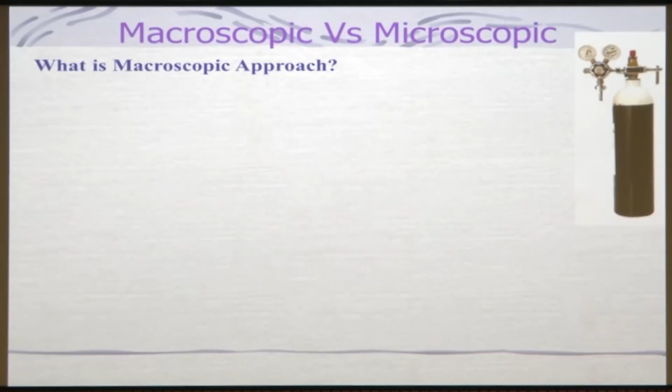If you look at this cylinder, the lower portion is black and the upper portion is white. From the color, if you know the code, you can say what it contains. I urge you to look at the color codes of gases. As an engineer, whatever your role, whether on the shop floor or in the plant, you need to know that. This one contains air, and the color code is black and white, though it may differ across countries. Nowadays it is becoming homogenized and we follow international standards.

So this kind of circular cylinder contains a certain amount of air, which is mostly oxygen and nitrogen. There are several other gases present in very small percentages which we are not bothered about. These two gases will be at higher pressure since it is a pressure cylinder. When you talk about it, what is happening to the molecules? Let us say two molecules, oxygen and nitrogen, for simplicity we assume air consists of oxygen and nitrogen, and they will be moving around, colliding and interacting with each other.

If we look at those things tracking each molecule, we call it the microscopic approach. But in engineering sense, we will not be looking at that level of detail, we will be looking at it grossly, meaning what is happening to the pressure. For example, this cylinder has a gauge, and this is known as the pressure regulating valve.

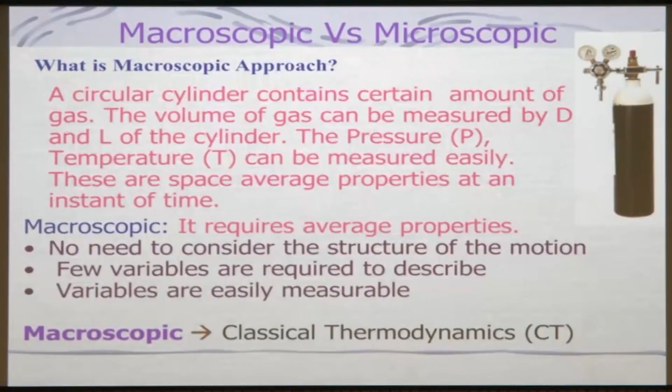Now, few variables are required to describe the system, whatever it is. So very few properties you can use, and variables are easily measurable - you can measure pressure, temperature, volume, these are the things, or other properties you can measure. Therefore, we will be dealing with this macroscopic approach to analyze thermodynamic problems, and this thermodynamics is known as classical thermodynamics. So in this course we will basically be dealing with classical thermodynamics, where we will be looking at macroscopic properties, or the macroscopic approach will be utilized to analyze the problem.

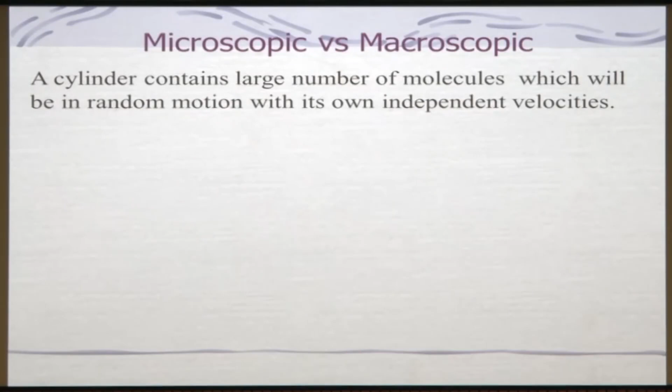Just to give you a glimpse of the meaning of the microscopic approach, let's take this same cylinder containing a large number of molecules, as I told you - like in case of air it's oxygen, nitrogen, but it can be several other kinds of molecules, which will be in random motion. It will be moving all the time, and will have their own velocities, because they will be colliding, and then velocities may be changing for each individual molecule. Not all molecules will have the same velocities.

It will be changing, and as a result, we need to look at - for example, if I take a small slice from the cylinder, 1 centimeter cube, how many particles will be there? It will be something like 10 power 20 particles, meaning molecules - these are very big numbers. Now I want to look at each individual particle, how they are doing.

So what will happen - the state of a particle can be specified by the coordinate system. If I take this as, let's say this is your x-axis, and this is your y, and perpendicular to this is your z. So now the coordinate system has to be fixed, and each molecule will be moving around. If there's a molecule here, it will have velocities in the x direction - vx, or it can be vy, and vz direction. And when it has these, you will also have to look at momentum.

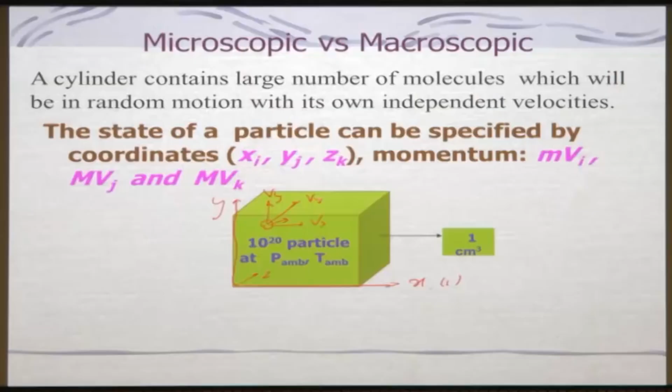Even the best computer cannot really compute with such enormous computational power needed. Now, how to deal with that? Is there any other way of looking at molecular level interactions and the extent of molecular activities? Is it possible? This is where we use what we call the statistical tool.

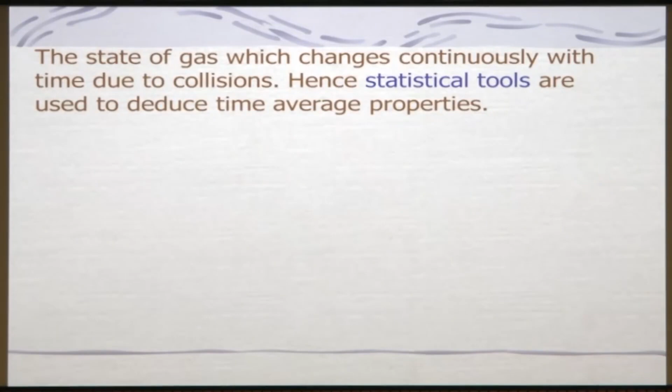So, it is being used, and such an approach where you look at microscopic effects like each individual particle or molecule, sometimes even atoms, is known as the microscopic approach. The state of gas changes continuously, because all the time each molecule will be interacting with other molecules, and we use tools known as statistical tools to deduce these average properties which we are more interested in. So, statistics comes into picture, and this thermodynamics is known as statistical thermodynamics, and microscopic means dealing with matter at a molecular level.

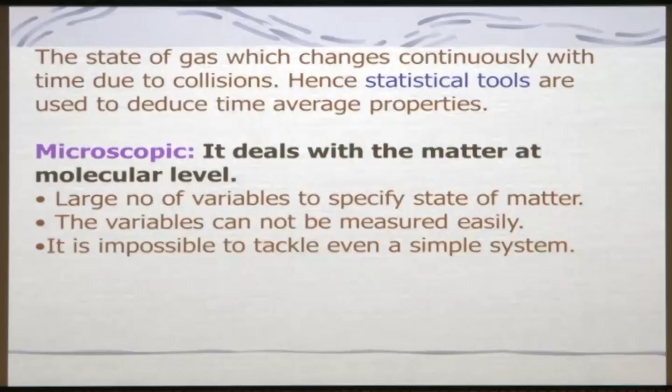So, in this case, there are a large number of variables to specify the state of the matter, and these variables cannot be measured easily. If I want to look at a molecule interacting, what is its mass and what is its velocity is very difficult to measure, and it is impossible to tackle even a simple system.

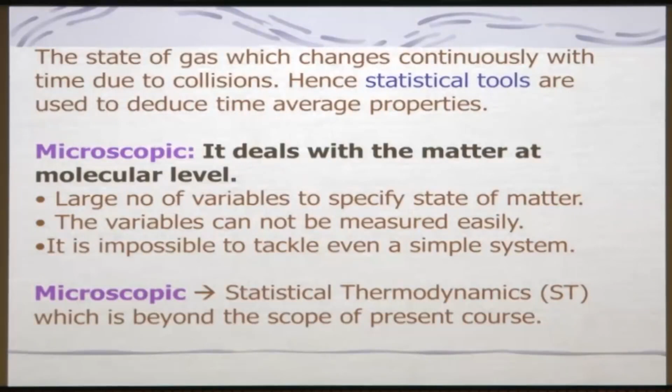And therefore we use the statistical tool, and the thermodynamics related to that which uses the statistical tool is known as statistical thermodynamics, which is beyond the scope of the present course. We will not be dealing with it, but if you are interested, you can take other courses in our institute, maybe in the department of physics and chemical engineering, where they do offer it.

However, sometimes I will give you a flavor of the microscopic approach whenever we are discussing it, on some occasions.

Now, whenever we are looking at these physical properties, we need to look at their dimension, because physical quantities will be characterized by dimensions. What do you mean by these dimensions? Any idea?

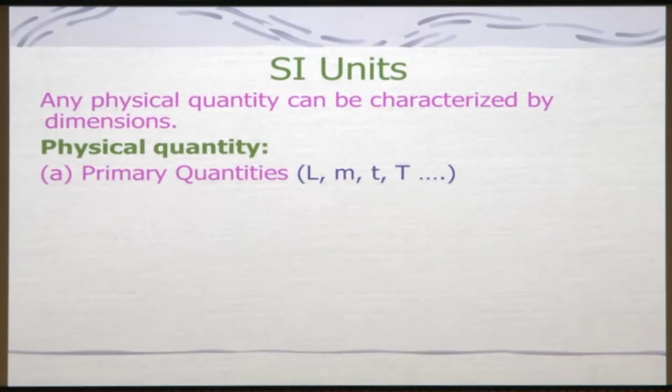Because if there is a physical quantity, we will have to assign something to it. For example, you say length — for length we will have to say it is a meter, or time, the second, like that. And if you look at these physical quantities, they can be divided into two categories: one is primary quantities like length, mass, time, temperature, and similarly there are derived quantities like velocity, acceleration.

Velocity is basically change in displacement with respect to time, and acceleration is change in velocity with respect to time, and force, and pressure which is force per unit area, and other things like energy. So, whenever an arbitrary magnitude is assigned to this dimension, we get the units.

So, for example, earlier days people used the British system — feet, pound, second, degree Fahrenheit — which are quite clumsy because it is not really very good. For example, if you look at the foot, 1 feet is equal to 12 inches, and inches again will be a little difficult to use, and other things.

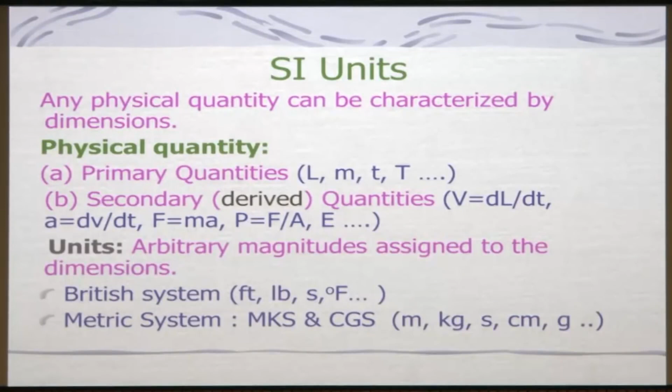Earlier days in our country also we were using the British system, but later on we found the decimal system, that is the SI system or MKS system, is quite convenient. So that metric system is being used — in the MKS system that is meter, kg and second, and in the CGS system we call it centimeter, gram and second kind of things, and this is being used very much.

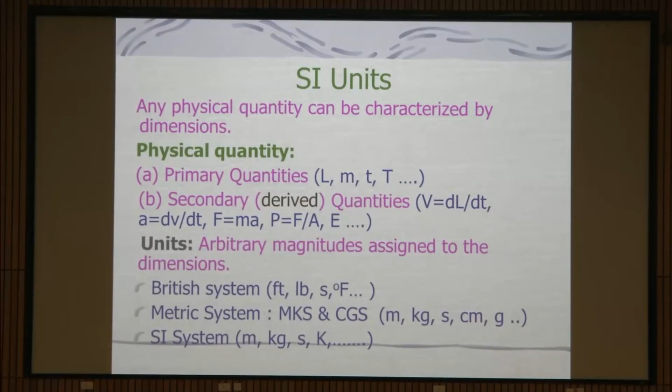If you go to our market, people are still using the British system, although it is less common now. At the international level, we use the SI system. It is the international system, and we will be using the SI system in this course, but sometimes problems may be given in other units, so you should know unit conversion.

In the SI system we basically use meter, kg, second and Kelvin. These are the international standards being used for mass, length, time and temperature.

For example, the basic SI unit for mass is kilogram, a standard alloy block of platinum iridium maintained at the International Bureau of Weights and Measures near Paris. It is kept as platinum iridium so that it won't change with time, a metal which won't corrode or erode.

Similarly, earlier people were keeping a metal length standard and calling it 1 meter, but nowadays that has changed. The basic SI unit of length, meter, is now defined as 16,50,763.73 wavelengths of krypton 86 radiation, corresponding to the transition between 2p10 and 5d5, in vacuum.

This is a more precise standard, because it is utilized for calibration. The primary standard, or whatever you calibrate everything with, should be as accurate as possible.

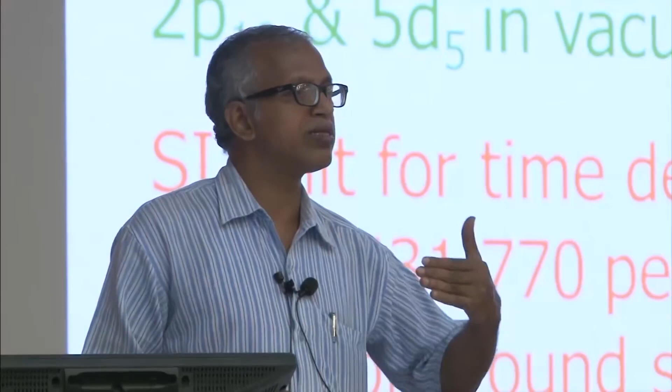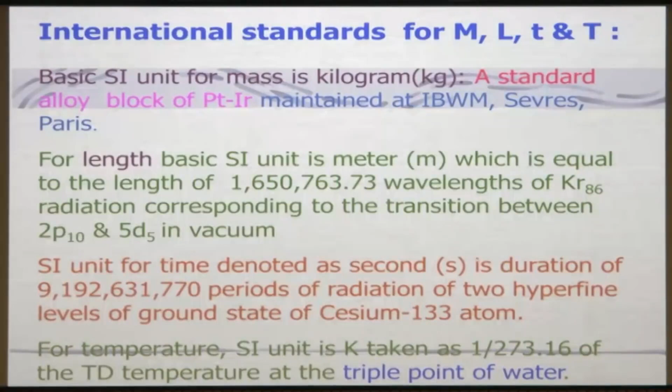For temperature, in recent times people use the triple point of water, expressed in Kelvin, taken as 1/273.16 of the triple point of water. Earlier, people used the steam point and ice point as references, but now the triple point is accepted worldwide because of its precision.

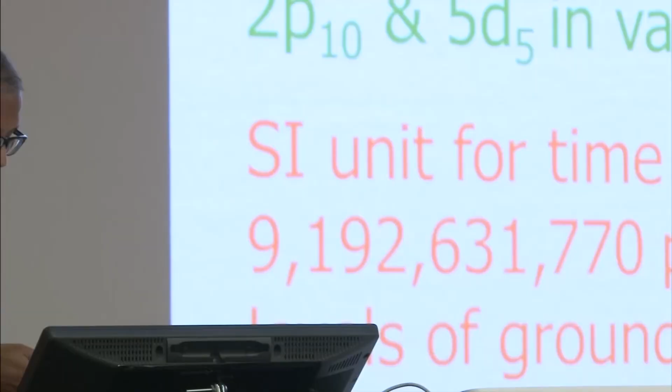We will be using various quantities in the System International, adopted around 1960. Acceleration is the change in velocity with time, measured in meters per second square, and force is F = m a, giving units of kg meter per second square, called the Newton.

Newton is a name, so we use a capital N, not a small n. Any unit named after a person is always written with a capital letter as its symbol.

Pressure, by definition, is force per unit area, and the unit of stress is the same as that of pressure since this is the normal stress. It is expressed with the Pascal, so we write Pa, with P capital and a small.

Work or energy is assigned the unit kg meter square per second square, since it comes from force times length, which is meter square by second square. One can think of it using Newton and meter, because kg meter per second square is nothing but Newton, and Newton times meter gives the joule, denoted J.

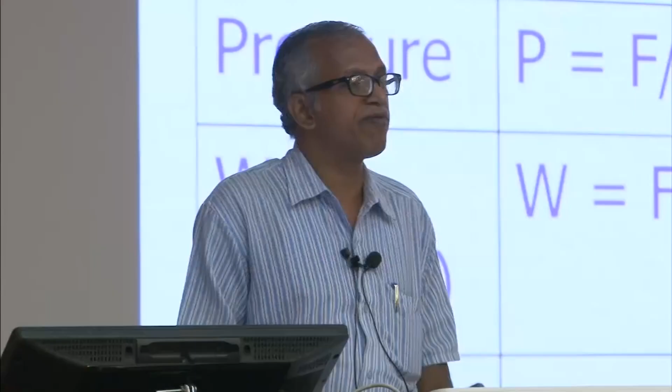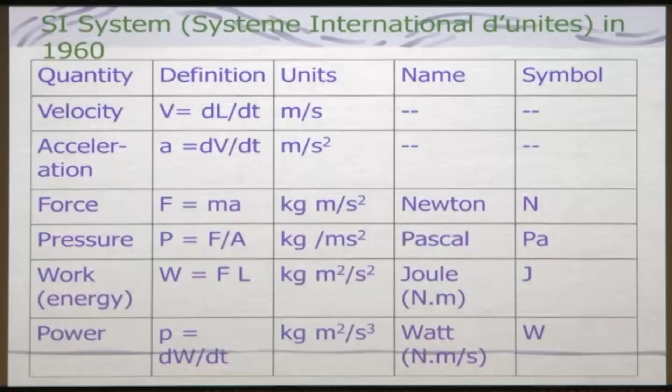Be careful, because people do fuss about it if you don't write units properly. So I will give you a few small tips on the convention for using these units.

Whenever any unit is named after a scientist, for example joules, watts, pascals, newtons, coulomb, it will be written with a capital letter. For example, 10 Newton, 1000 Pascal - P will be capital, Pascal, and A will be small.

All others are in small letters, for example 10 kg and 20 meter per second. And if I say kilometer, what will it be? It will also be small letter.

But if you go on the highway, sometimes people write it in capital, am I right? Did you observe that? Particularly you can see it on the Lucknow and Kanpur highway. You could have observed that, it is not right.

We will have to be careful: when you say Newton meter, there should be a gap. But if it is millinewton, we write m and N with no gap. So you will have to distinguish between these.

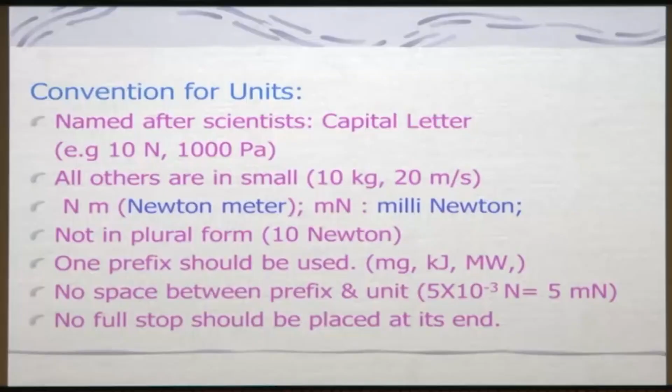Let us take a very simple example. A tank of 2 meter cube volume is filled with kerosene of density 850 kg per meter cube. Determine the amount of mass m in the tank. So we will have to do that.

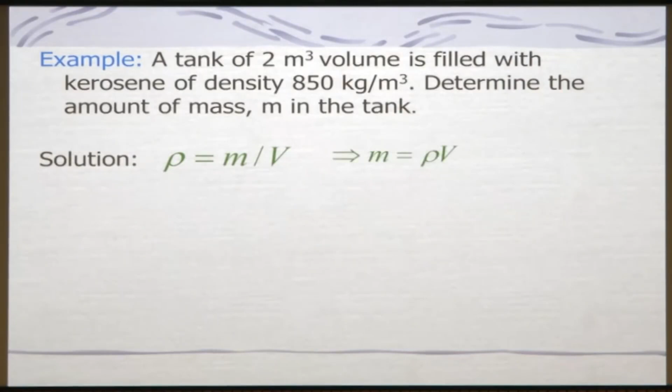What you will have to do is very simple. You are given density, you are given the volume. So basically density is equal to m by v, and you find mass is equal to rho into v, and you just plug in the numbers.

If you look at it unit-wise, on the left hand side mass is kg, and density is kg per meter cube while volume is meter cube, so it cancels out to kg. And if you put in these values, you get this number. This is a very simple one.

What does it indicate? You might be thinking, why am I showing this simple example? What is it indicating? What have you learned from this example? It is very simple - you use a formula, plug in numbers, and you get the answer.

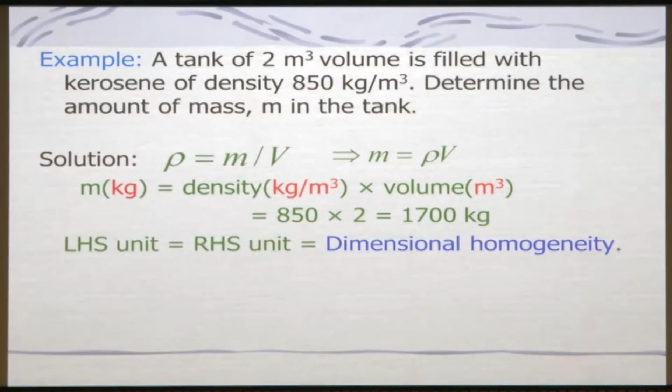It says that the left hand side unit is the same as the right hand side unit, which we call dimensional homogeneity. That means a mathematical equation should be dimensionally homogeneous, am I right? That is the first thing one has to check, whether it is right or wrong.

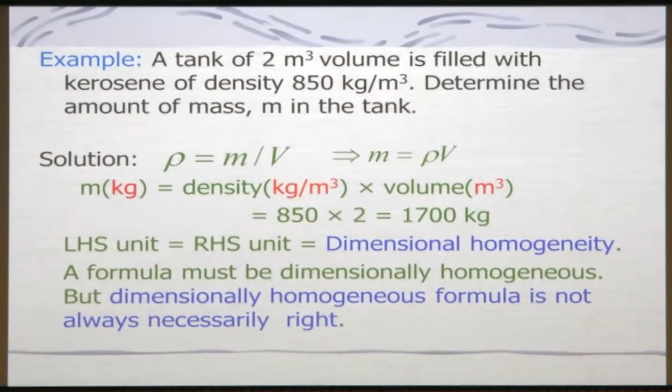And if it is dimensionally homogeneous, is it right? The equation need not be right. But that is the first condition - a mathematical formula must be dimensionally homogeneous. A dimensionally homogeneous mathematical relationship should not necessarily be right. It may be right, it may not be right. So one has to be very careful.

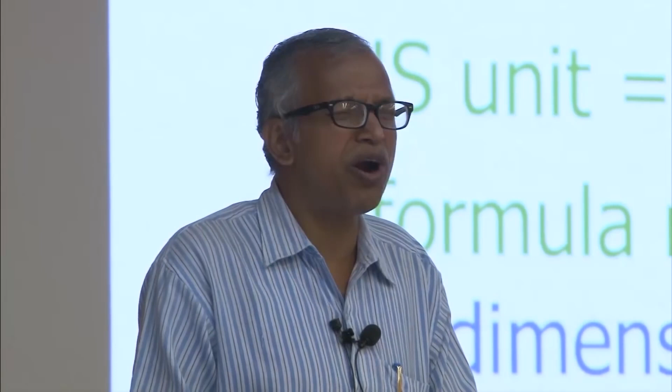So I would suggest you be careful - in the sense it is a tricky question, not exactly tricky, it is just to recognize whether you know this or not. You may say, look, it is out of my course. It is not - it is a simple thing that requires a little presence of mind, which people didn't do, as I experimented.

So you need not think, why is he giving such a simple example? But this is not only a simple example, it is a very profound example for illustrating the dimensional homogeneity of a mathematical equation.

Now we will be looking at the definitions and concepts of thermodynamics, which is very important. Why do we need to look at definitions and concepts?

Every subject has its own vocabulary. You need to understand the words or vocabularies of a particular subject properly and precisely, so that misunderstanding in that subject can be avoided. Therefore, one has to look at the definitions and concepts. Most of these things you are already aware of from your +2 level science, but we will redo it so that it seeps into your mind and you won't commit any mistake. So please listen carefully and try to think about it.

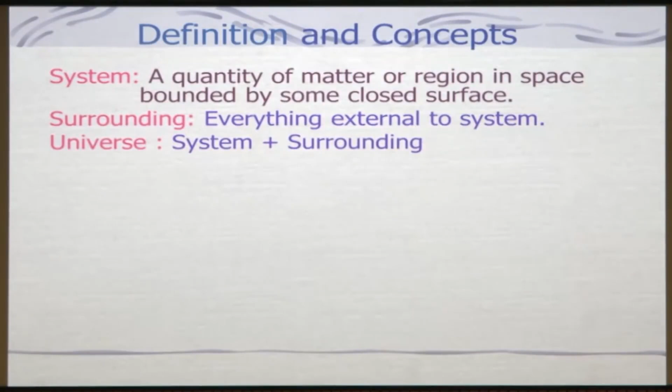So everything external to the system is known as surrounding, and system and surrounding together we call the universe. So if I look at a system here, it is having a boundary, and rest of the things will be the surrounding, and this total we call a universe. Let me take another example.

I am having a cup of tea here, and now this temperature is higher - hot tea - and it will be interacting with the surrounding. So what will be the surrounding? For example, let us consider this is the cup, and it contains some amount of hot tea, and now it will be interacting with its surrounding. What will be the surrounding?

Suppose the temperature is there, let us say I will keep this cup here. What will be its surrounding? The system I can take as the hot tea itself, or I can take the full cup as my system - I am having the liberty to choose that. Now I am interested to find out how it will be interacting with the surrounding, meaning some heat will be transferred to its surrounding. What will be its surrounding?

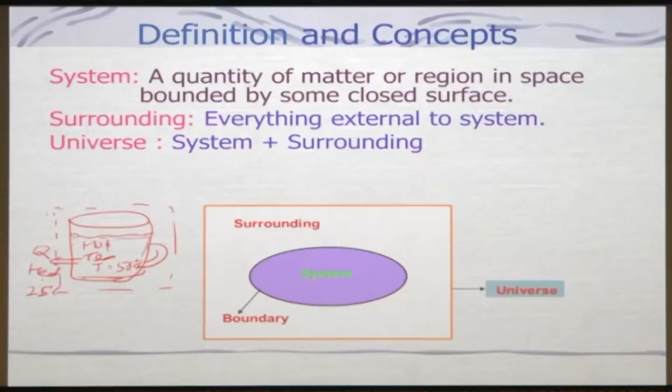It will be closer to where a change is occurring, where heat transfer is taking place. If heat transfer is happening, say the temperature here is 50 degrees Celsius and here it's 25 degrees Celsius, the change occurs because of heat transfer to nearby places, and only then do we consider it the surroundings. So my surrounding will be very close to my hot cup, where the physical properties are changing due to the interaction of this system, the hot tea, with its surrounding. Generally people say, this is my system and this is my surrounding, but no, wherever interaction is taking place, only then do we call it a surrounding.

As I told you, the boundary is very important because it separates the system and surrounding. Now how to choose the boundary is very important. It can be real or imaginary in nature, but choosing the right boundary is a very important point one has to look at, because that boundary defines the system.

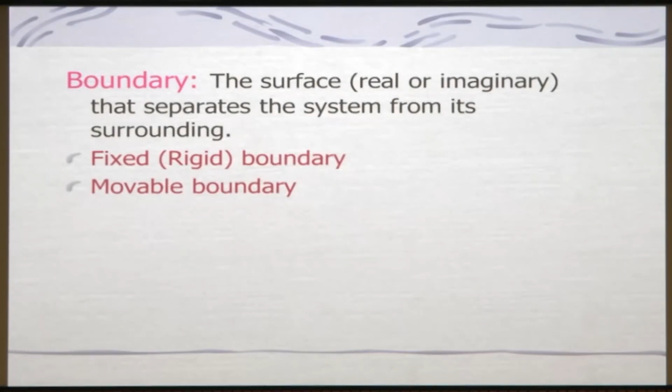As I told, it can be a fixed boundary, a rigid boundary, a movable boundary, and it can be diathermal, meaning heat transfer can take place between the system and surrounding through the boundary. For example, in the hot coffee case, heat has to transfer through the wall of the tea cup. Can I take the thickness of the tea cup as the boundary? Mathematically it is not right - mathematically we take it as a thin boundary. If heat transfers through the boundary, we call it diathermal, and there will be some boundary which won't allow heat to transfer, which we call adiabatic.

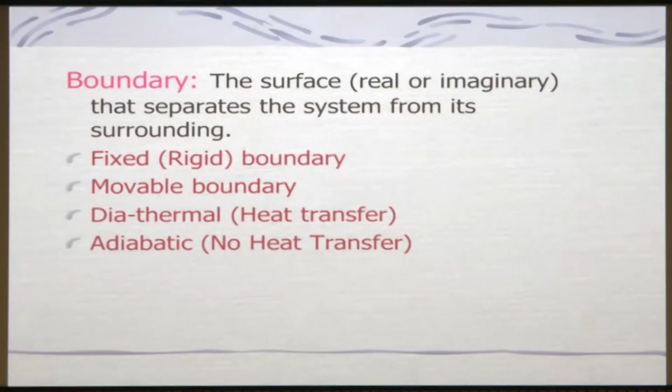Most of the cases, like an air conditioned room like this, the wall should act as an adiabatic wall so that heat will not be transferred through it, otherwise you will have to pay a penalty, because a lot of heat will enter the room and the cooling load on your air conditioner will be higher. Therefore one has to insulate it properly.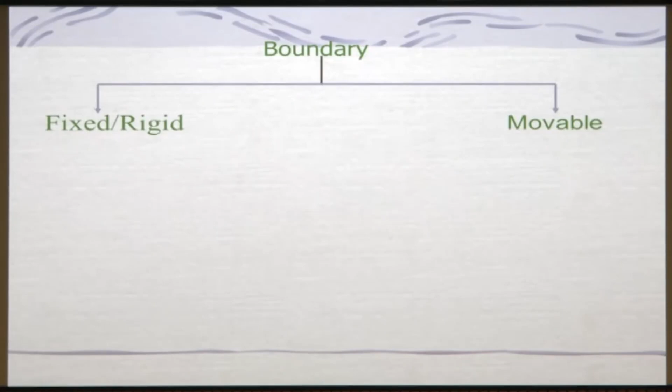To summarize, the boundary can be fixed, it can be rigid, it can be movable. For example, I've already given you this example, like the system - I can take this wall of this room. If I take this room, I can take this room as that. That means wherever you are having interaction, you take that as a system and boundary.

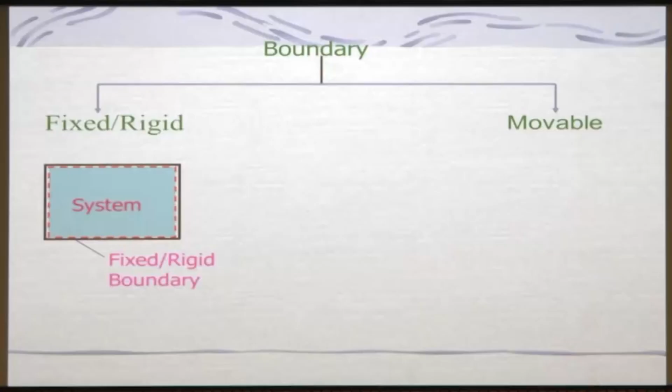And in movable systems, for example, there is a piston cylinder which you use very often. Can you tell me where you use your piston cylinder? Wherever you use it, you will be using it in your day to day life, am I right?

Yes or no? For example, nowadays there is a water crisis across the country, you are aware of that. We use the hand pump - in the hand pump there will be a piston and cylinder. You inflate your tire in your cycle by hand or by compressed air. If you are giving it by hand, you will be using an air pump where the piston cylinder will be there, am I right? You must be riding your bike - in a bike, piston cylinder arrangement will be there or not? Yes or no? Bike means automobiles - auto bike, or your car, your truck, buses, everywhere piston and cylinder arrangement will be there. Yes or no? But you people are not saying anything.

You will be using a piston cylinder arrangement where the system - we can consider this gas which is there in the piston cylinder, for example, and the piston will be moving, and as a result this boundary is moving. There might be some heat interaction between this system and its nearby surrounding. So we will be handling this kind of problem very often.

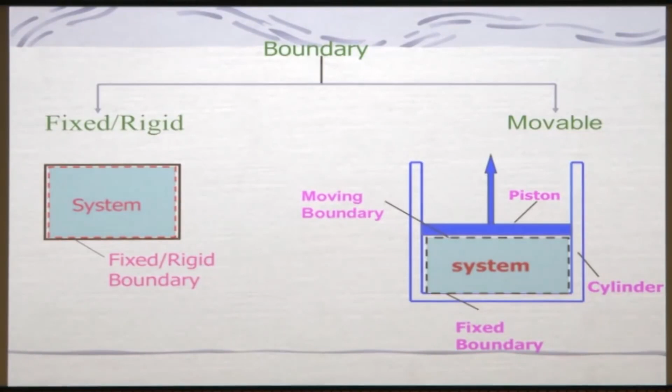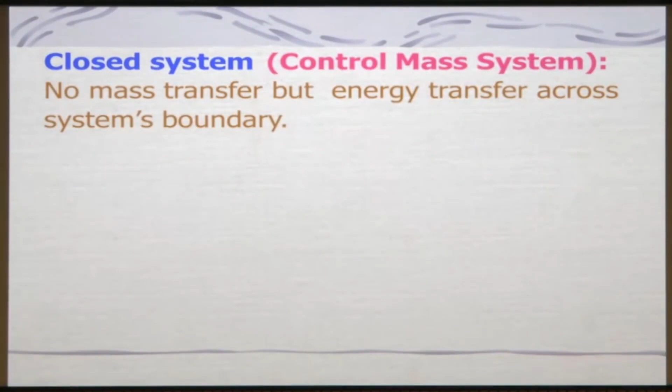There is what we call a closed system, where no mass transfer takes place. That means if I look at this boundary, what is happening? We take 1 kilo of mass and we can give heat here - what will happen to this mass? Mass will not change. However, there is energy interaction. For example, now you have, let's say, 60-70 students are here, if I consider 70 students, 70 mass.

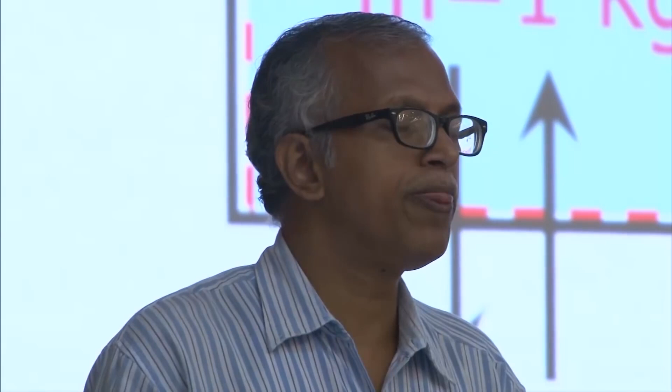In this system, if I look at you people as a system, I am interacting with you, transferring certain kind of information. That means there is interaction. If I take this as a system, as students all together, the number of students remains same, so it is not changing. But if some of you walk out, then it is changing. This cannot be a closed system because there is interaction.

For example, imagine students coming and going out while the teacher speaks, like in a public speech or a politician's speech where people keep coming and going. That is what you call an open system.

So you can think of a fixed boundary as a closed system, where in this case it is a fixed boundary, but in another case it is a moving boundary, like a piston cylinder, where the piston goes up and comes down while energy interaction takes place. This is also known as a closed system because there is energy interaction but no mass transfer taking place, mass remains same. Therefore we call it a closed system.

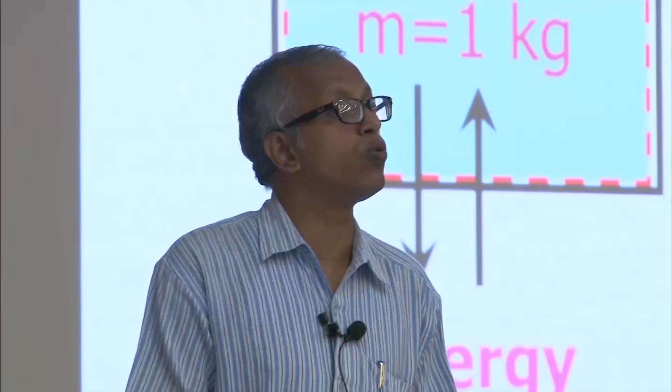Now the heat is coming in from the solar, we are getting a lot of heat, particularly now in summer, and it will be absorbed by the earth surface, and also by us, by the trees and other things, and a lot of heat is also going out.

Now I want to analyze this. Depending on what you want to analyze, we can choose the system, because choosing a system is very important. Otherwise it will be very cumbersome and difficult to analyze the problem, how to fix the boundary, where to put the boundary.

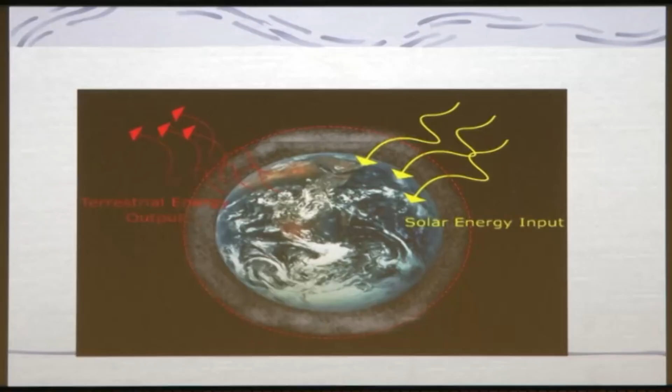In an open system, both energy and mass will be crossing the system boundary. Let us say in winter you people might be using the geyser for getting hot water in your hostels, am I right?

So there will be heating and then water will be flowing out and in and flowing out. So then we can consider this as a flow system, as I gave the example of this room, where students come in and go out, making it a kind of open system.

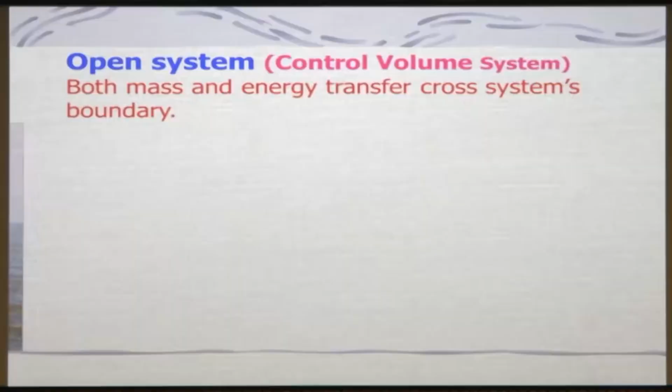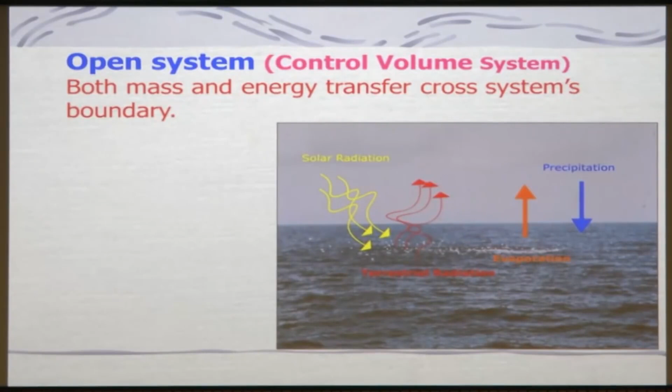So if I look at what is happening, the solar radiation is coming in and going out, there is precipitation, so we will consider this as an open system. For that, I can take this as a system boundary, this as my system boundary.

So what will happen is this can basically be an open system, because there is precipitation going on, coming up and coming down. I can think of a turbine, which I have drawn schematically, where some mass is entering and some mass is going out with a certain pressure, it is expanded and you get the work output. We can consider it an open system, and take this as the system boundary, which is basically the outer casing of the turbine.

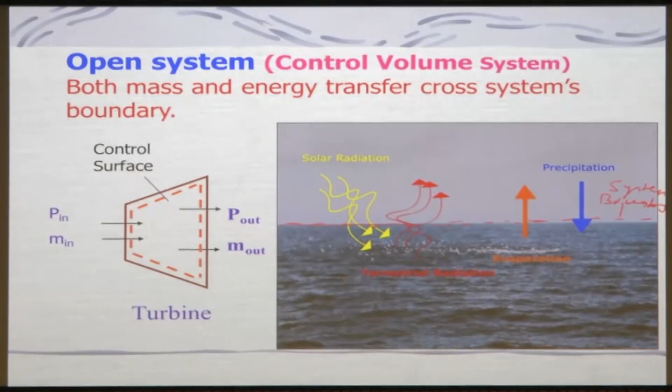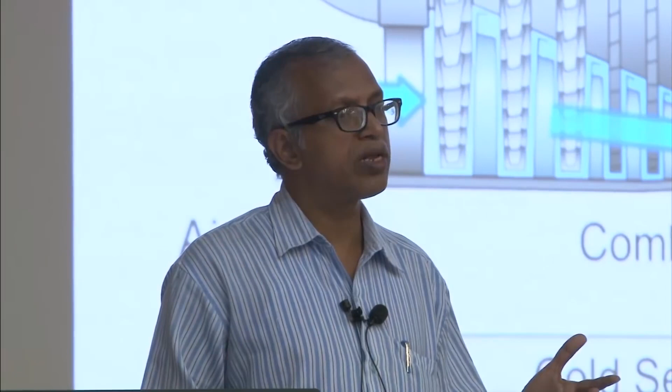Let us consider an example, a gas turbine engine, which is quite complex in nature, used for power generation and also for jet engine applications to provide thrust to aircraft and other vehicles. If you look at this, there is a compressor and an air intake, and the flow will be entering here. As it enters, the pressure will be increasing and you will be giving some work through the shaft.

So I want to analyze this thing. What do I have to do? I will have to take a system boundary corresponding to this place, and then look at how much work is coming in, and what is the change in mass and the change in velocities and pressure and other things. We will look at it and find out how it is interacting.

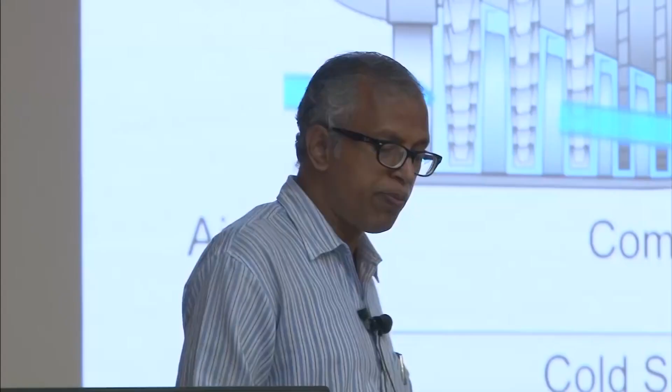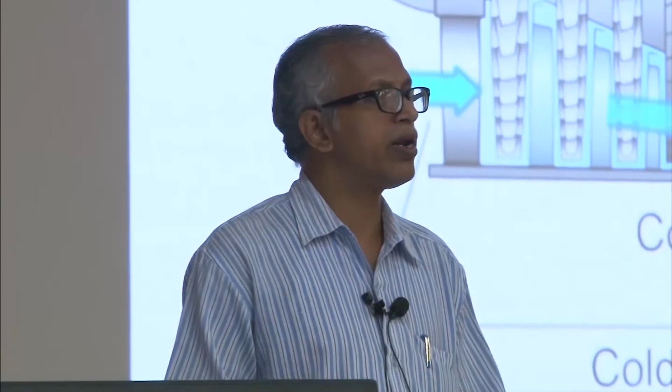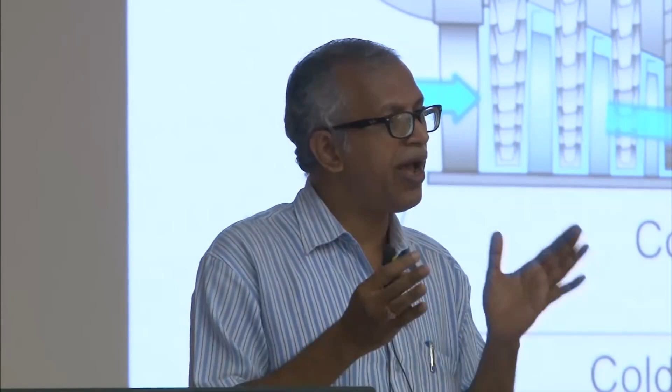Similarly, in the combustion chamber, we burn some fuel and can take this as a system boundary and look at how much change in temperature is occurring. So these complex systems can be looked at as a whole, or you can take individual components, like the compressor, air intake, combustion chamber, turbine or nozzle, and analyze each one, or take the whole system and analyze what is happening. So depending on the situation, you can choose, and this is an example of the open system.

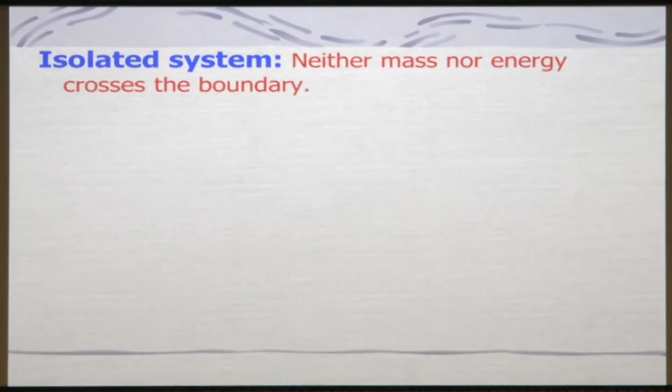So when neither the mass nor the energy is crossing the system boundary, we call it an isolated system. That means what will be happening in an isolated system? Is it having any applications? There is no energy interaction, there is no mass also changing or coming in. That means there is no mass interaction as such, so we call it an isolated system. We will be using it sometimes, but under what condition will we use it? Any idea?

Like people are isolated. How? Suppose you do some nuisance in society, you will be isolated, put into a jail. Am I right or wrong? So you are being isolated. So it is an isolated system where the interaction will be low, and we will be using this whenever we will be talking about entropy calculations.

So, as I told earlier, and I am harping on it again, the particular type of system must be identified carefully for carrying out thermodynamic analysis. Otherwise your life will be miserable for analyzing. That does not mean I cannot use a system to analyze. For example, if I take a problem, whether I will be taking control mass or whether I will be taking control volume, the open system is also known as the control volume system.

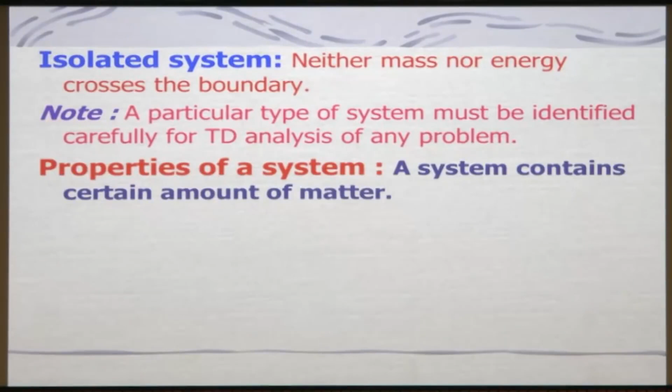Whenever a system is interacting with the surrounding, there will be change in the properties of the system and also the surrounding, and therefore we need to look at properties of a system. As I told earlier, a system contains certain amount of matter, and to describe a system and predict the change of state, we need to note down properties of the matter. For example, if I am giving some heat to a piston cylinder arrangement, the pressure will be changing, so also the temperature, and then we will be looking at those properties.

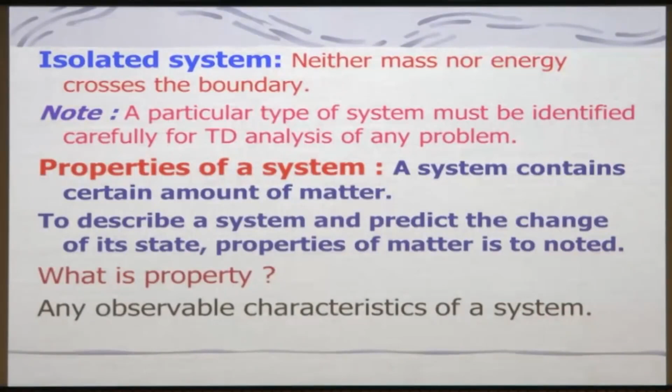So what is the property then? Property is basically an observable characteristic of a system. That means what you can observe grossly - pressure, temperature, like all those things.

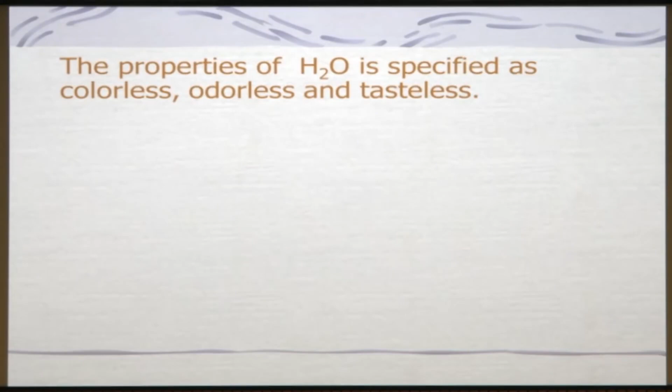For example, properties of water can be specified as colorless, odorless, tasteless. Now, can these properties of water be considered as thermodynamic properties? Is it possible that we can say look at these are the thermodynamic properties? No, it is basically related to the potable condition of the water, but nowadays these properties are not good enough to say whether water is potable or not. Now we are bothered about things like TDS, that is the total dissolved solids, and biological factors like bacteria. All those things we will have to consider now to determine if water is potable, but these properties are not good enough for us.

For us, thermodynamics must be associated with energy and its transformation, or energy and its interaction with the surroundings. So what are those properties? Those properties are pressure, temperature, volume, mass, density, and several other things.

So the essential feature of properties is that they basically have a definite value at a particular state - that means you should have particular values, and also it must be a point function. That means it must be independent of the path taken by the system during its interaction with its surrounding. So one has to consider that.

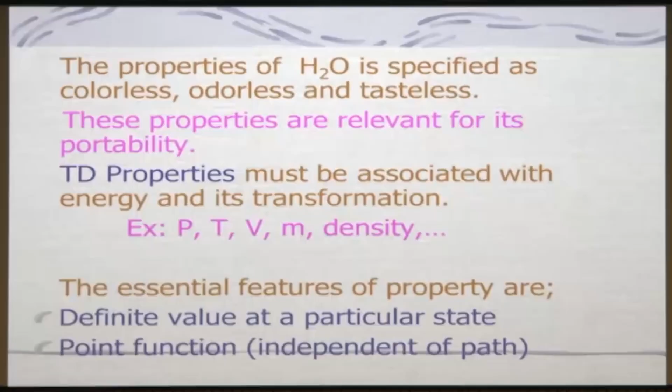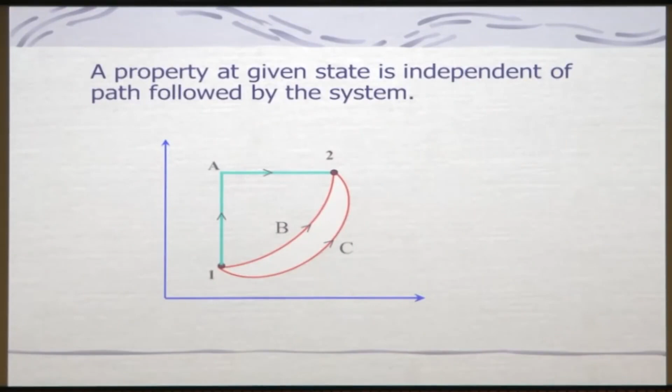In order to show this mathematically, we can say property P - just using symbol P, it can be pressure, it can be temperature, it can be anything. Let us say a system is interacting with surrounding, and there will be change in properties. Let us say the pressure is changing. If I take a closed chamber and start heating the gas, then naturally pressure will increase. So if I say that the change in pressure will be P2 minus P1...

And if I say pressure is a function of x and y, I can write it down as dP equals dou P by dou x when y is constant, into dx, plus dou P by dou y when x is constant, into dy, which equals A dx plus B dy. What is A then here? A is nothing but dou P by dou x when y is constant, and B is equal to dou P by dou y when x is constant.

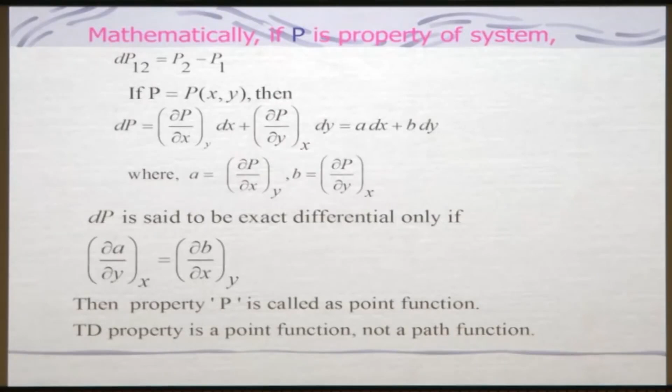So now I want to find out if P as a property is an exact differential or not. What will I have to do? I will have to use this condition that dP is said to be an exact differential only if dou A by dou y when x is constant equals dou B by dou x when y is constant. So then property is called a point function, and thermodynamic property is a point function, not a path function - it does not depend on the path.

So we will see in the next lecture how it is - mathematically we have shown it, physically we will look at it, and we will stop over here. Thank you.